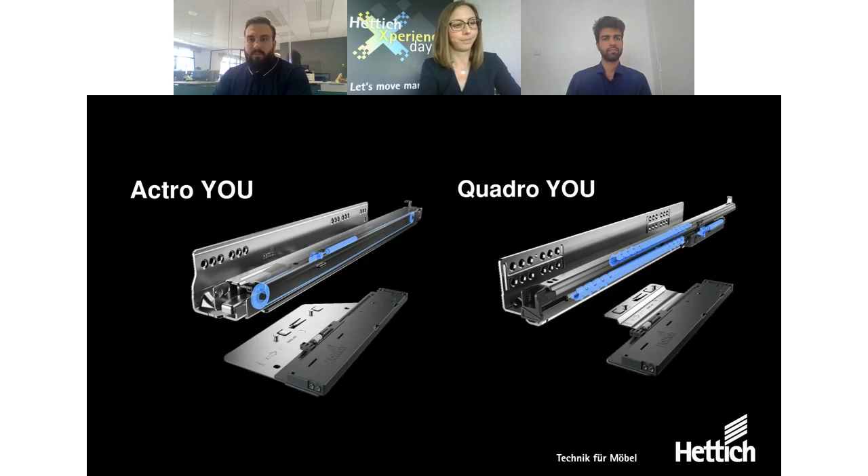Now is the time to reduce your costs. Let's talk about this point. Last but not least, it is possible thanks to this drawer AvanTech YOU. We have a platform concept, meaning an optimization of operational processes in purchasing, storage, and production.

No mounting of clips or bottom rebate. You can easily assemble the steel rear back with clips and the wooden one by direct screwing. The rear back dimension is identical to the width of the bottom. This is a very big advantage for the assembly.

This drawer has a simple and safe disassembly and assembly of the facade. Once dismantled, the facade goes into a holding position and can be removed effortlessly. This solution is particularly practical in the case of wide facades.

With this drawer, you can make your production more efficient and cost effective. As I told you, there is no milling of the bottom, which is a very big advantage. The bottom width equals the rear panel width.

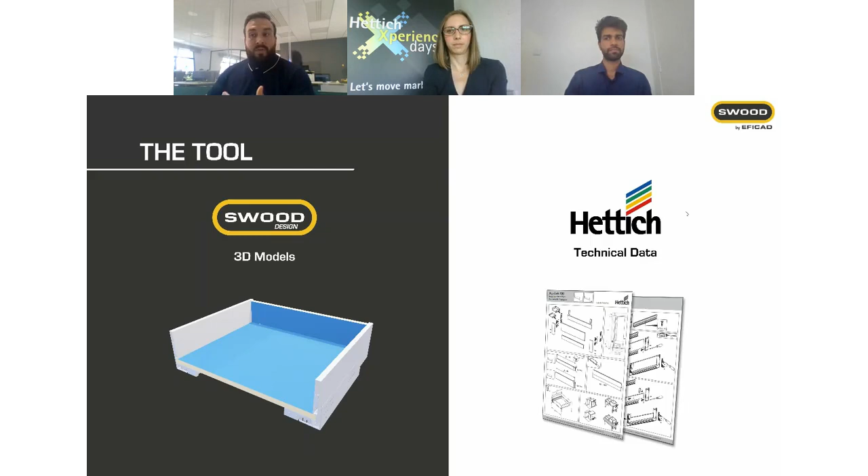So then into SWOOD, this is called a SwoodBox. So on the next slide we'll have a few words about what a SwoodBox is, which is quite important to understand how it will work and how we will deal with it. So first, a SwoodBox is a parametric library component.

So you can see on the video on the right hand, we have our library where we can select the SwoodBox, and especially the drawer SwoodBoxes that we have just created with the tool, and then insert it in a parametric way into our design. So as you can see, we detect different volumes, and by this way we will then create and insert these parametric components at once into our designs.

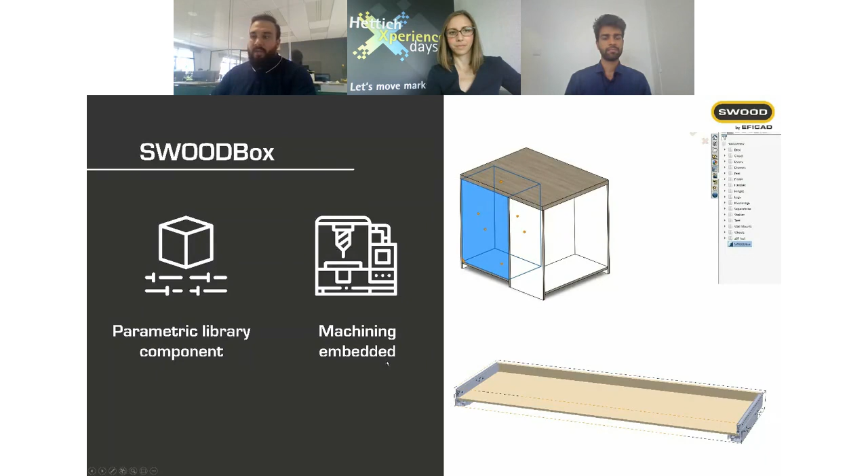And this is not the only thing. I mean, we will insert the components for the design, but we will also embed all the machining information. So as Audrey mentioned before, we have all the drilling patterns that are already inserted and embedded into the 3D model, and then it will apply it on all the adjacent panels in our designs. So yeah, the SwoodBox will insert components, drawers, and then also apply all the different machinings that are embedded. So that is a real advantage of the tool.

So now let's move on to the interface of the tool. Here is the global overview of the tool, and now we have different areas in which we'll have different features. So the first one is on the top left hand. We will have here the choice of the library.

So do you want to download drawers, hinges? Then you will select your supplier, so here Hettich, and then all the product range that are accessible and available through the tool. And in this case, we'll find ArciTech, AvanTech YOU, and InnoTech Attira. So for sure, you will find everything that you need here.

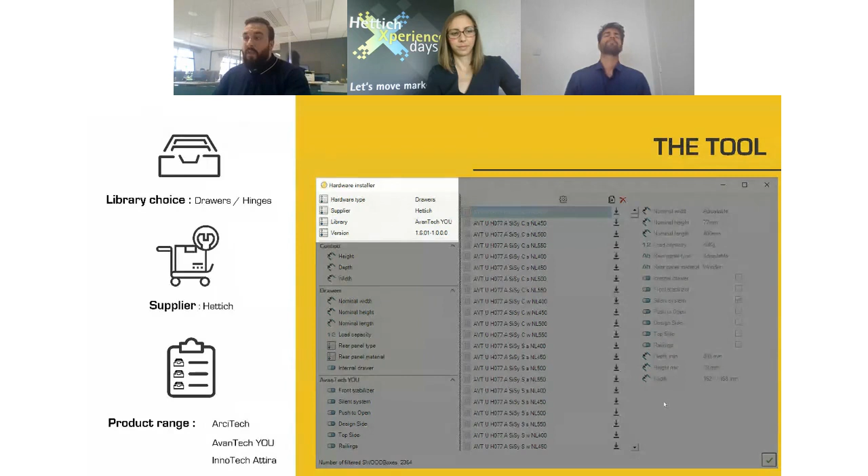Then it's here when we go to the Design Advisor tool. We will start with some settings and filters that are available to narrow down your product list. So it means that regarding the context that you have and the design volumes and context, you will then be able to fill up some data here, and then it will automatically propose you the right drawers for your designs.

So then in the middle, you have the SwoodBox list that is then up to date with the features value that you have just written. And then finally, on the right hand, you have all the informative SwoodBox properties that are created within your model. So you have here all the options of your components.

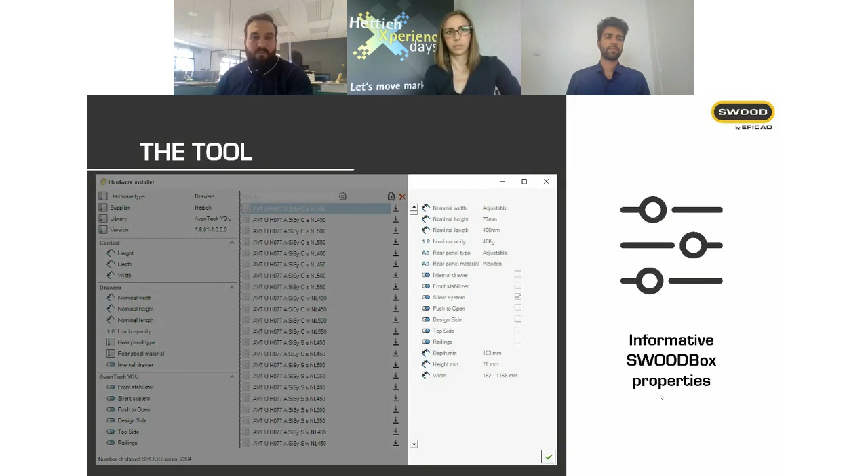So on this tool, we will find a lot of key advantages. The first one is that we have ready-to-use parametric 3D models. We will easily find the one 3D model that we have, put it into our library, and it is something parametric that we will be able to use several times during our design process.

Then for sure, it will speed up the design process because you have now the library already set up, and you can find really quickly the hardware that you need. The other thing is that you have an all-in-one solution. As I mentioned before, you have everything into the same platform, so everything into SolidWorks and Swood into the same ecosystem and area.

Then we have also the 3D models that are always up to date. It means that everything embedded and all the technical data are kept up to date with all the last technical changes provided by Hettich. So it will ensure a high reliability rate, which is the last point, because as we mentioned, we also embed all the machining information, and everything will follow up your different changes. So this will make your designs reliable, which is one of the stronger things.

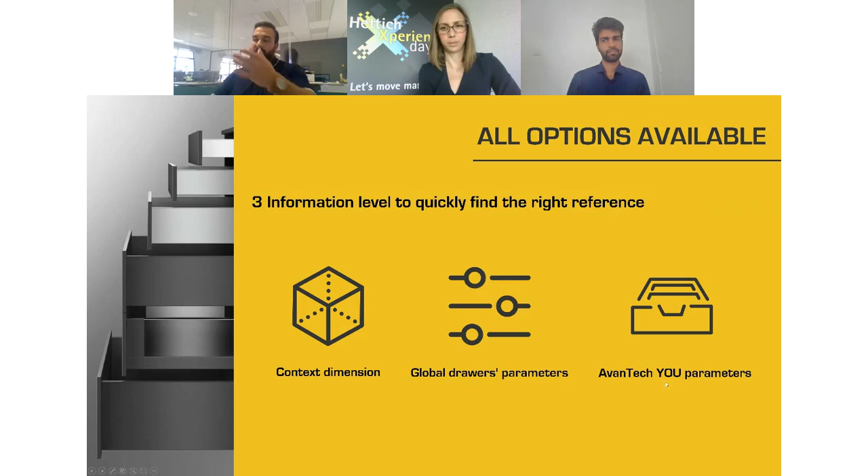As we have just seen, there are 3 levels of information to quickly find the right references, the right drawers, the right components that you will need. So you will have first the context dimension, which is the global dimension of your design that you will be able to fill. Then you will have the global drawer parameters regarding the AvanTech YOU system, and finally the AvanTech YOU parameters that you have fully integrated into the tool.

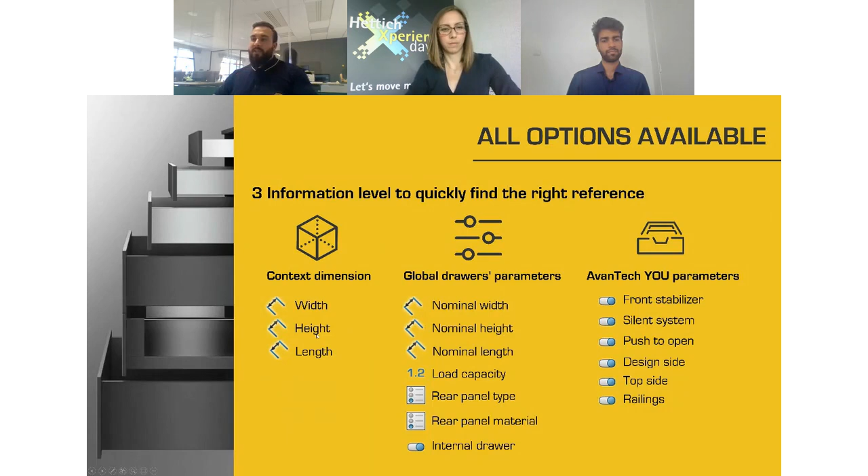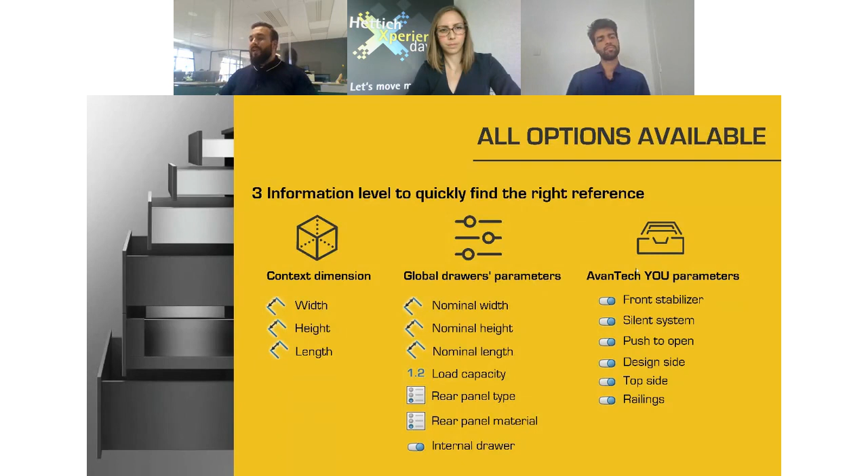And if we just have an overview of this one, it's like this. So all the global and context dimension, then the different options regarding the rear panel, is it a wooden panel, and so on, the internal drawer. And finally, all the options regarding the AvanTech YOU parameter, if there's any front stabilizer, is there a silent system, push to open, design side, top side, or railing system.

So then all these settings will help us to quickly narrow down the list that we have, and then to find the right AvanTech YOU drawer, as you can see here.

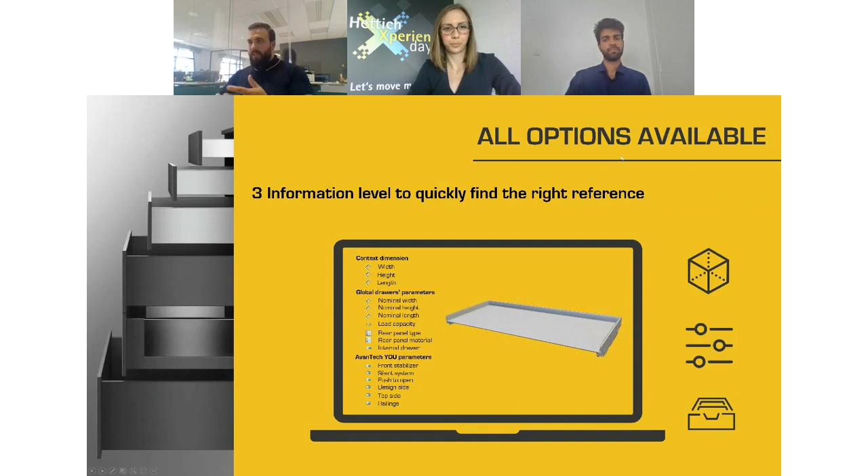So then we will have a look at how it is integrated. So first a video where we have the full process and how we can deal with this kind of tool within SolidWorks and SWOOD.

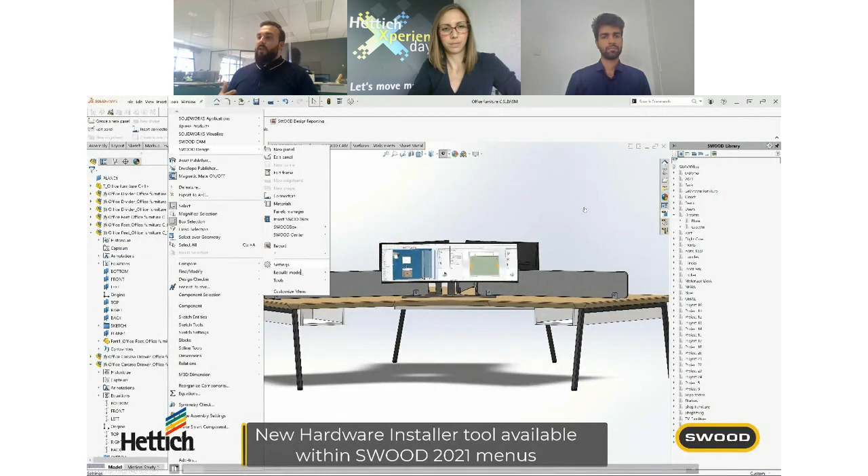So here we will just run the hardware installer, and then we will have access to the whole library. In this one, we will just have to select the kind of hardware that we want to insert, and then the model that we want to insert. So by this way, we will then insert and type some filter values that will help us narrow down this list, as I mentioned. And then from here, it's quite easy to find the one that we need.

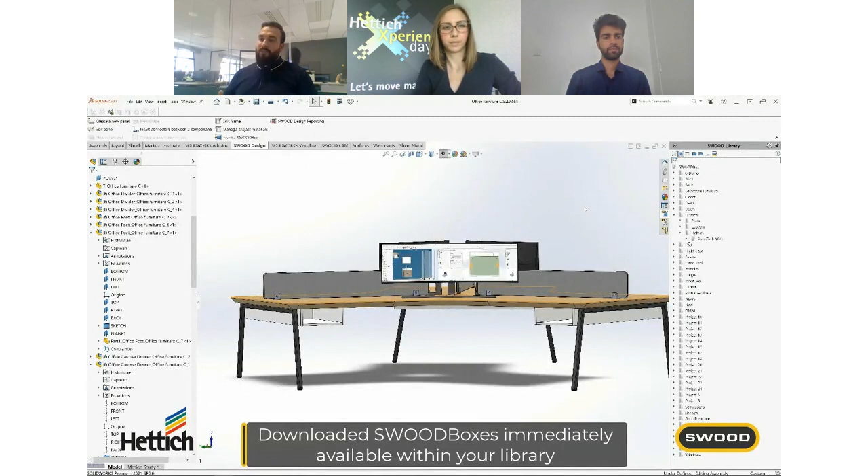So I don't know if you paid attention, but we started with more than 2,000 SWOODBoxes available, and at the end we have only 15. So then it's immediately available into the SWOOD design library, and then we can insert it really easily.

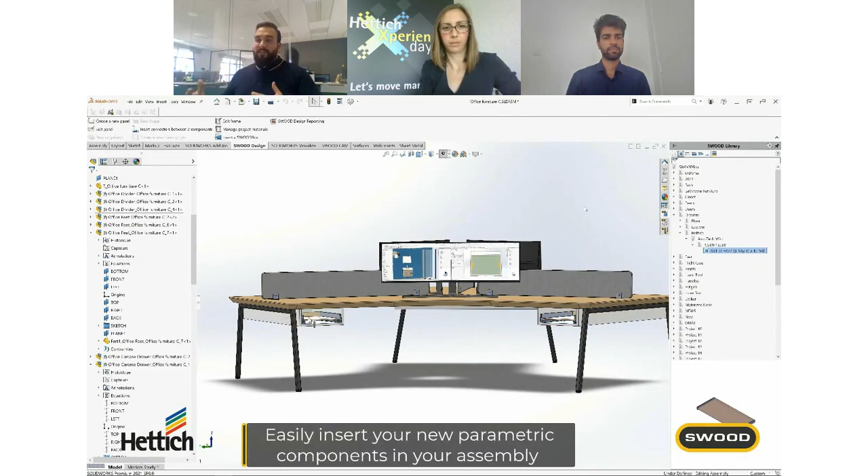As you can see here, we can insert it several times at once in a really easy way. We have detected the right volumes, and then we have inserted our drawer system. And this is not the only way.

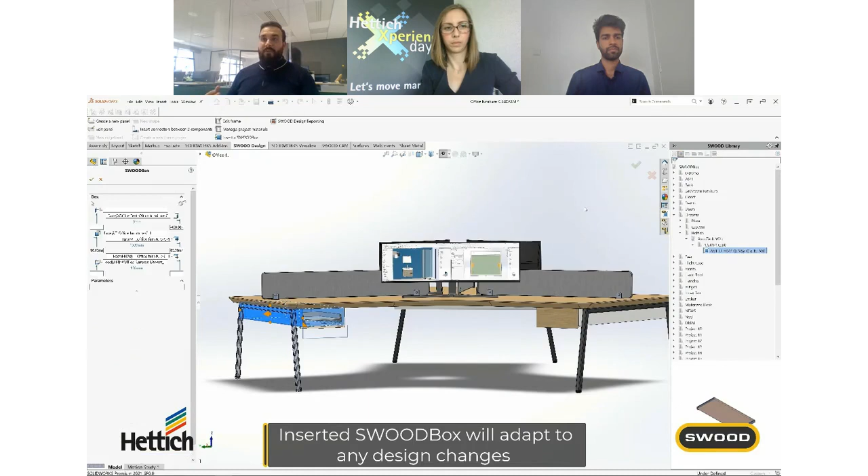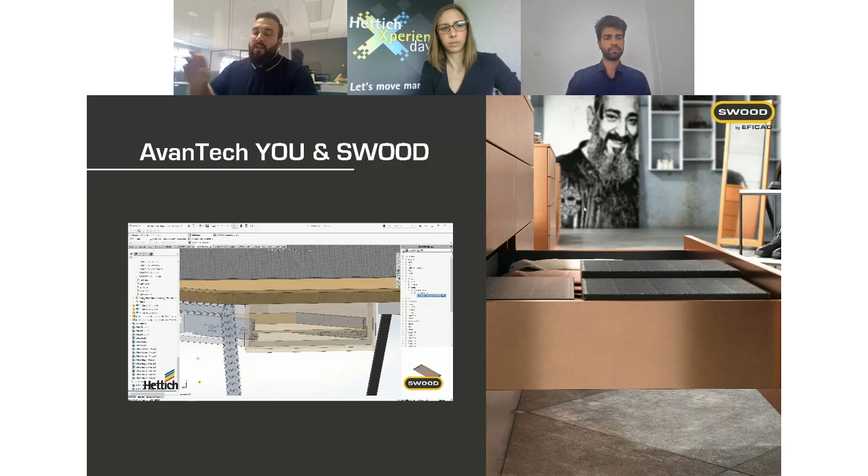As I mentioned, we are creating parametric features. So it means that now when we change the dimension of the area, and here of the drawer, you can see that everything rebuilds to create the right design at the right dimensions. So this is the full process that we have from the hardware installer, and then from the Hettich technical data, to then the integration within the tool.

Then there is one last point of this presentation, which is the reporting features that we have within SWOOD and SolidWorks, in which we will find all the different information regarding this AvanTech YOU system. So as you have seen, we have inserted panels with a wooden panel for bottom and rear panel.

So the first thing is that we will automatically extract all the data of this panel, and then extract the panel list of our project, and especially the dimensions of this one, as you can see here on the left hand into the laptop.

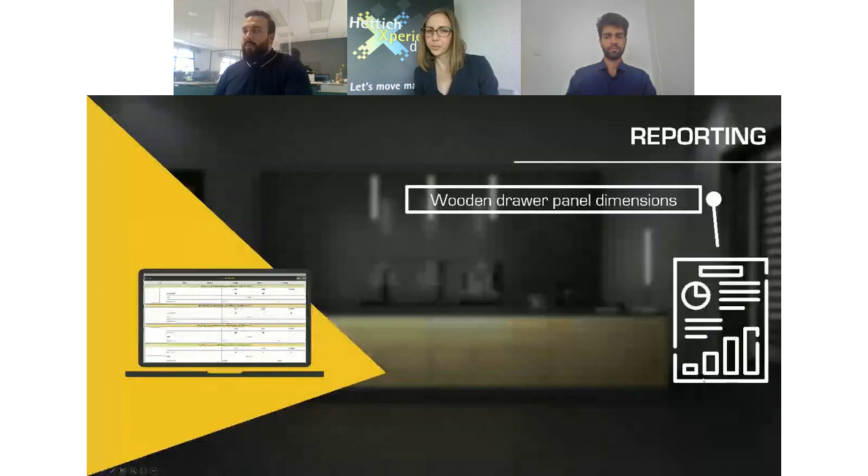So then the second thing is that we also create at the same time all the wooden drawer panel programs. As we have a CAM solution which is based on automatic shape recognition, we will then automatically generate all these programs for these panels.

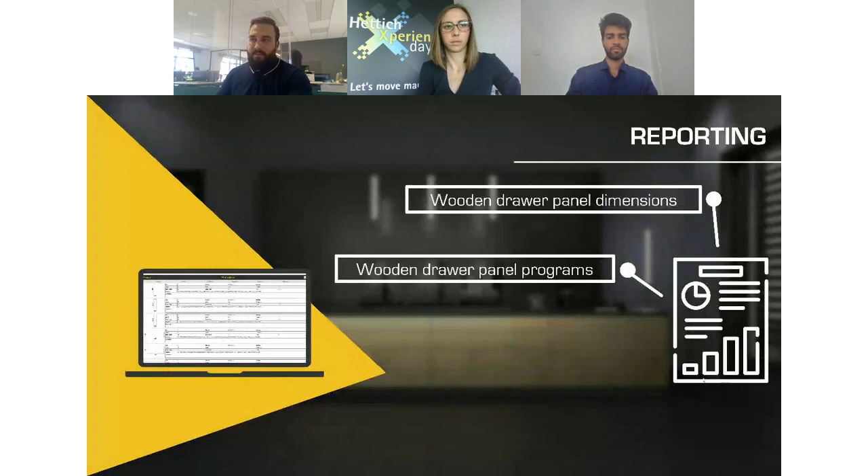And then we will have all the hardware information regarding the supplier, the references, the quantity, the material if needed, and the cost that you can also configure and integrate into SolidWorks and SWOOD.

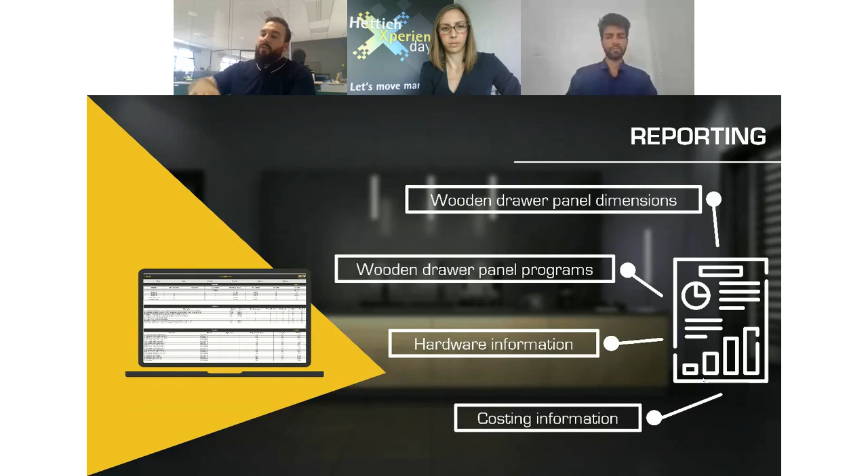And then, as I mentioned, we will have also the costing information for the global project that you have into your design platform, which is SolidWorks and SWOOD, and you will find costing information for material, hardware, programs, and so on. So then you will have a real sum up of all the costs that you may have in your projects.